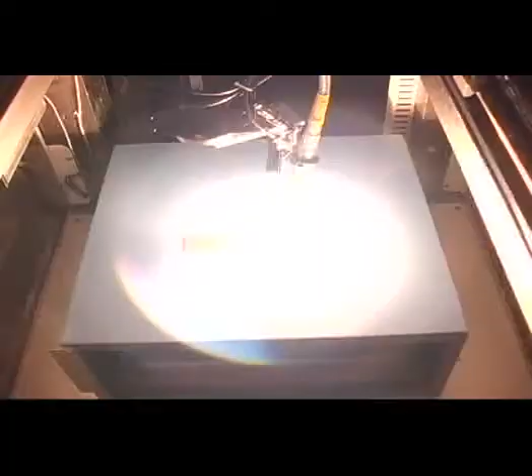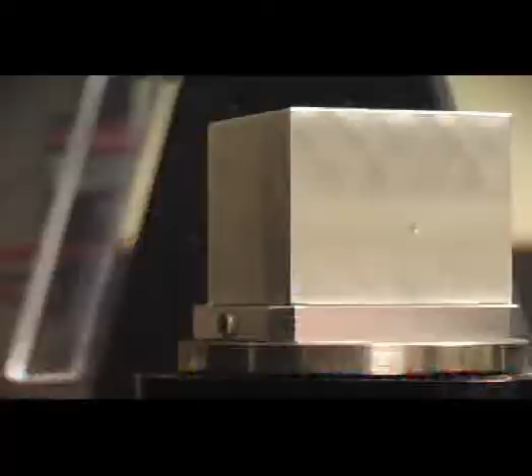I can envision in 3 to 5 years a dozen micro machine companies in Rockford actually building micro machines to go out and actually change the way people make small parts. Micro machine. What we see here is the beginning of a whole new era of manufacturing in the world, this micro-manufacturing, making little things.

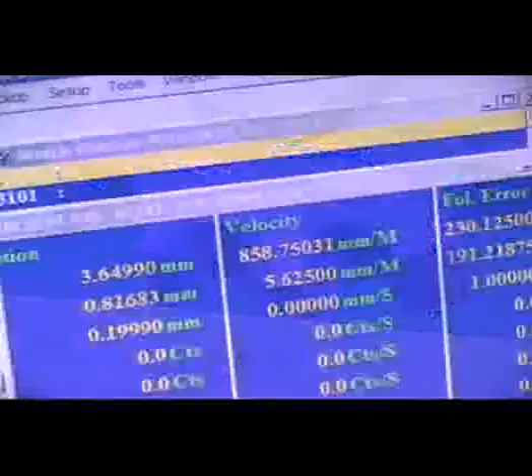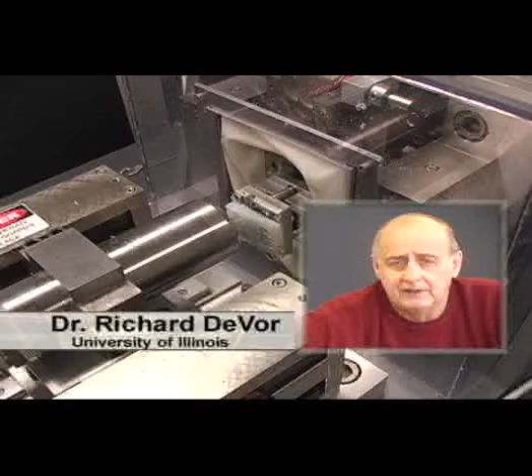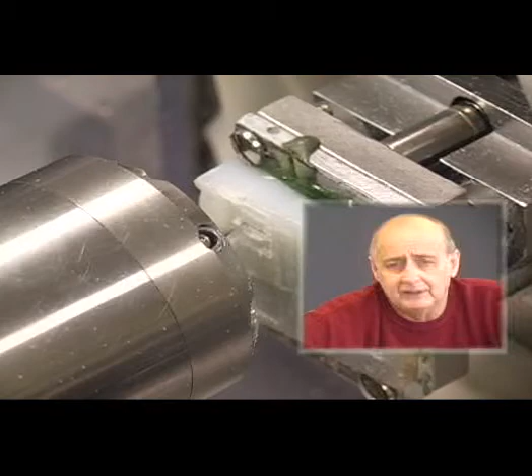We're talking about things that are significantly smaller than the diameter of a human hair. Federal government is today making several $100 million investment in R&D and nanoscience and nanotechnology. But if we are to turn nanoscience into usable technology, we will have to bridge the gap between the nano world and the micro world and the macro worlds. And here is where micromachining can play a very important role.

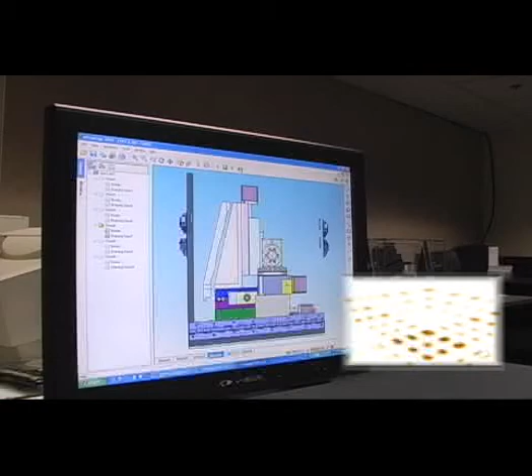I'm working on the development of the next generation micro-meso machines. We would like to hold the accuracies in the sub-micron level. We would like to go all the way down to 0.1 micron. I hope we'll be able to achieve it. The typical tools that we'll be using, they will go down to 20 microns in diameter. That is 1/5 the size of the human hair.

1 micron. 1 micron. 1 micron. A micron. It is 1/1,000,000th. 1/1,000,000th of a meter.

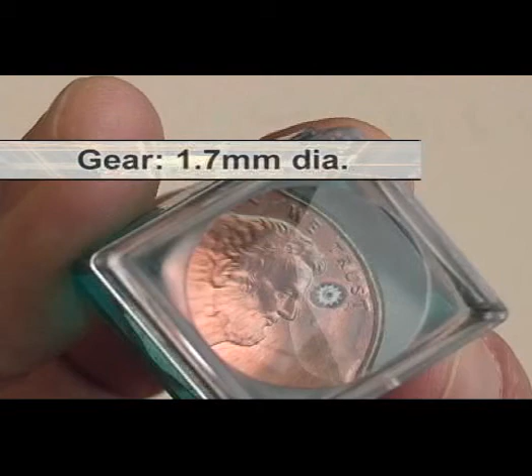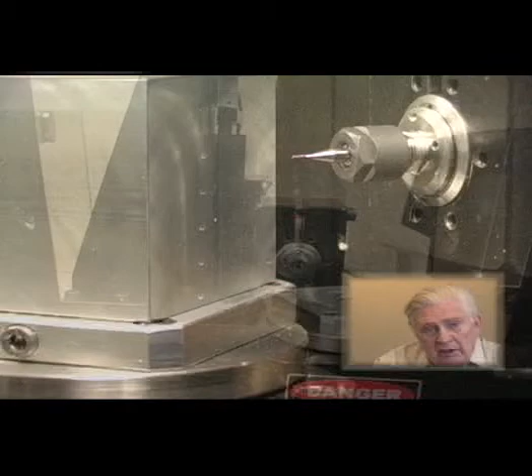Atometric is a company that Tom and I have started to address the issue of micromachining. That is to say, machining small parts with extreme accuracy. Well, the machine is about 20 inches long, 15 inches wide, and about 14 inches high. That means it's designed to sit on a desk in an office and not in a factory floor.

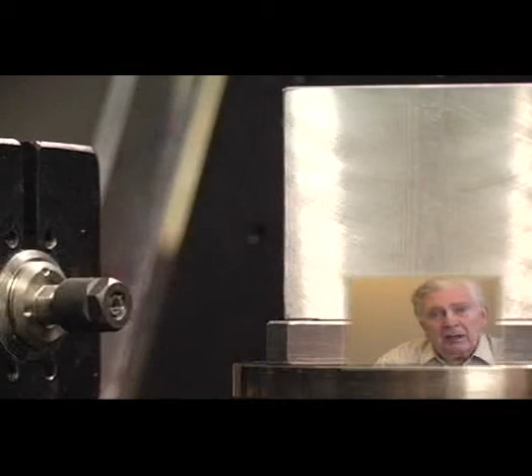We are taking laboratory and university research projects and implementing them in a commercially viable machine. We machine to extreme accuracies within 1 micron. A micron, recall, is 1/1,000,000th of a meter.

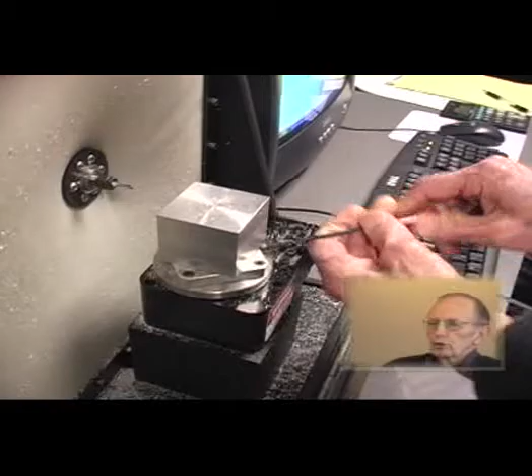My partner Neil Meisen and I got in this business originally with altruistic motives to help stimulate a new area of manufacturing economy in the Rockford area, something that could grow and help Rockford to become the micromachining capital of the world. The EigerLab is an ideal place for us to do this work, and this is where our lab is located. So we feel we're addressing a market that requires miniaturization and mass production. We hope and expect to sell this machine on the marketplace in quite some volume.

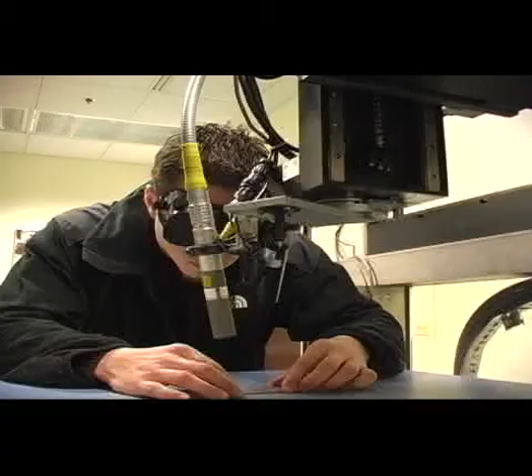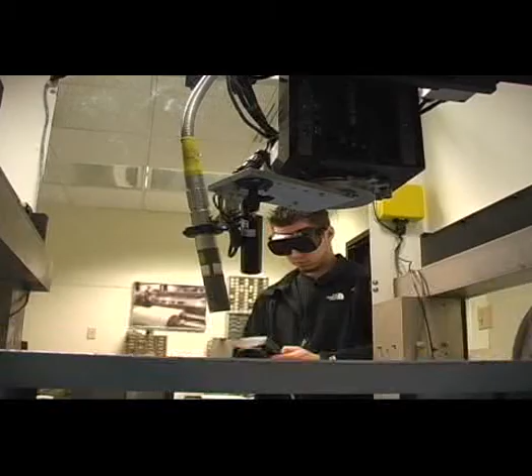We received some aircraft-grade titanium alloy. We were able to drill holes 400 micron in diameter at extremely high rates. We're trying to maintain about 5 micron repeatability from hole to hole.

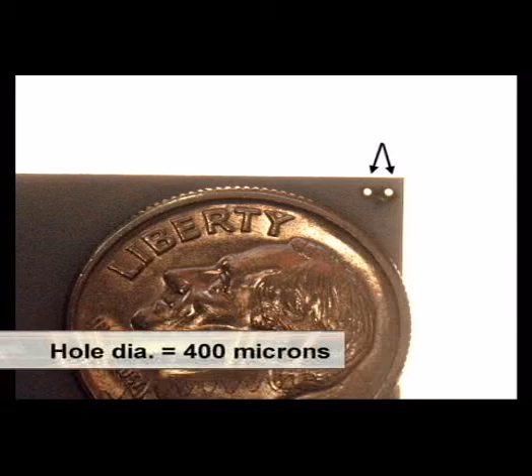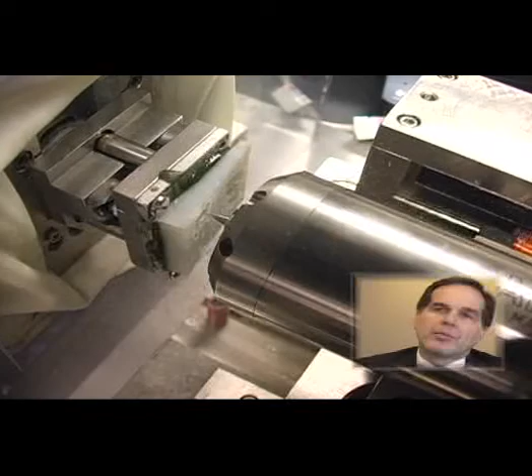Well, one of the things that we're promoting at the EigerLab is the commercialization of the micromachine technology. Rockford Area Ventures' whole mission in life is really to commercialize some of these advanced manufacturing technologies that are in the lab. And what we want to do is actually foster companies to take these technologies and actually commercialize them.

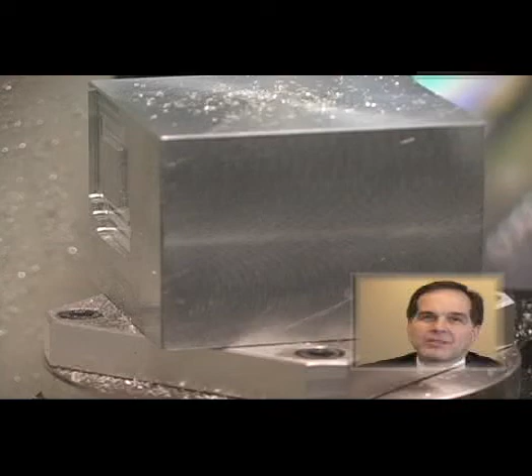Miniaturization is a growth industry. Everything is sort of shrinking down. And really what we're talking about is a vehicle, if you will, that allows a lot of these smaller parts to be made much more cost effectively than what we would do today. There really is an entire industry that can spring up around this business. Microforming tools, micro lathes, micro EDM, micro lasers.

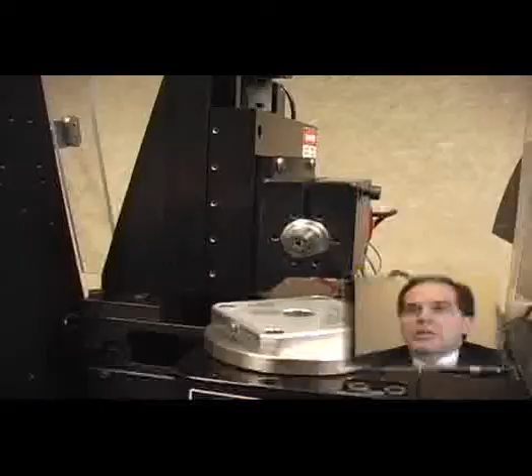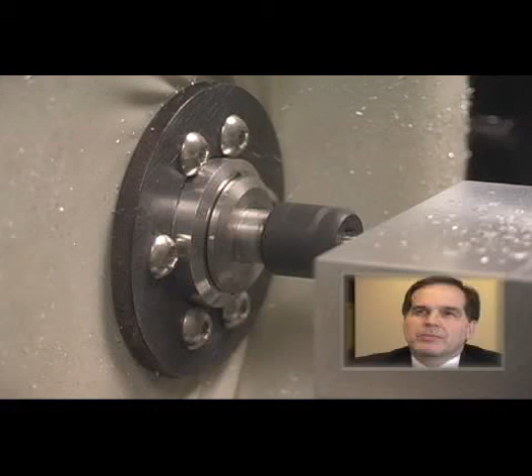Rockford is extremely well situated because within Rockford there are actually companies that make all these different types of machines. The Rock River Valley region is really sitting on a huge opportunity, mainly because we have a huge depth of knowledge of metal cutting and metal fabrication and making things in general.

We have everything, all the ingredients here in Rockford. Anywhere in the world, if they think of micro machine, they should think of Rockford. That is my dream.